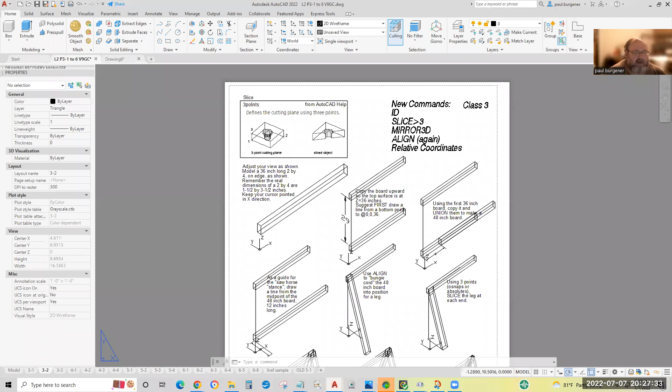Okay, in intermediate class this afternoon we went through the sawhorse exercise in the handout. Here's the handout for it. I've been meaning to update or redo this for a while, so you might want to stop and get yourself a copy of this.

I'll refer back to it off and on, but again, I need to redo it. It's kind of advanced for this stage in what the class is learning.

Anyway, I'll start by following the steps 1 through 9, trying to do it in the order shown, from top upper left to lower right. Let me start a brand new start-from-scratch drawing.

I think part of today's confusion was the 45-degree polar tracking angle with an isometric viewpoint. The z-axis perfectly lines up with the 45-degree polar tracking line on the XY plane, so I'm going to change it back to 90 to avoid that confusion. So again, I'm setting polar tracking to 90.

As always, I recommend my 5 favorite object snaps: endpoint, midpoint, center, quadrant, and intersection. Never have tangent, perpendicular, or nearest running. Nearest might be handy for short-term use, but always, always, always set it back to these 5 object snaps, and I don't think you'll ever have any regrets.

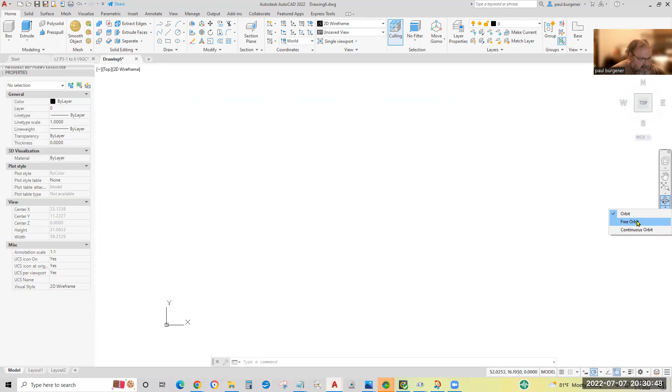Let's go back to a brand new start-from-scratch drawing. I'll go to the navigation bar, free orbit, and rotate it so it's approximately a southwest isometric, but I'll go out of my way to make sure the z-axis is not pointing straight up. We'll hit escape to get out of the 3D free orbit.

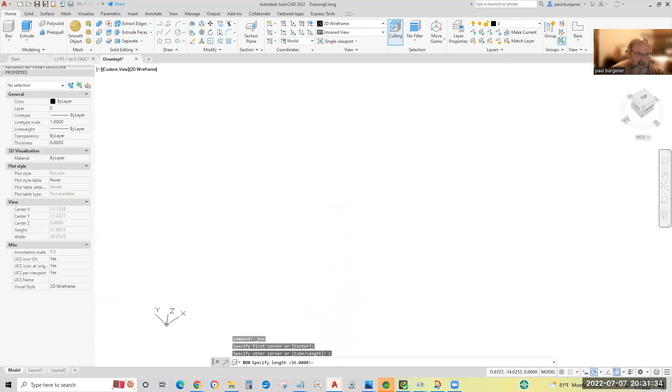Step 1 is to make a box. It might be easier if I start on 0, 0, 0, but I'd like to keep the icon intact without obstruction. So I'll pick a random point, pick length, because I don't know what the opposite corner is without typing the old-fashioned relative coordinates. I'll type length and line up the polar tracking angle to exactly 0 degrees.

We want the top board of our sawhorse to be 36 inches, so for the length in the X direction, I'll type 36 and hit enter. By the way, length is always, always the X direction. Width is always, always the Y direction. I'll type 1.5, the cut finished width of a 2x4.

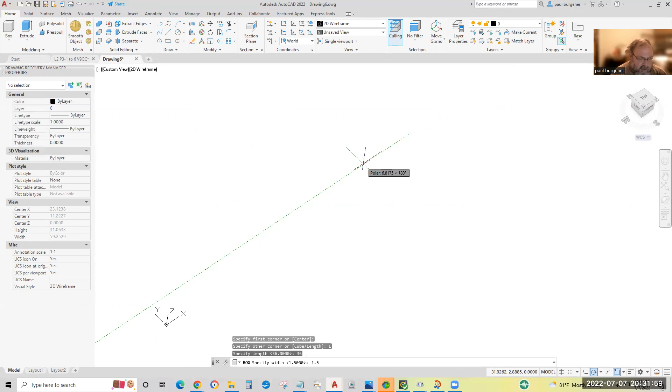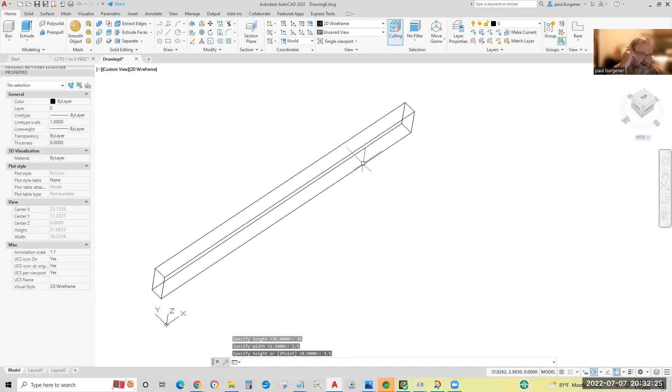And the height of a cut 2x4 is always 3.5, not 4. It's 3.5 because they lose a half inch after the kerf of the blade and the finish sanding, so 1.5 by 3.5 is the real dimensions of a 2x4. I'll hit enter, and there is my 2x4 that is 36 inches long.

Let me do an ID for good measure. ID, what happened? ID, enter. This point should be on the z=0 axis. It is. Hit enter. This point should also be on z=0 elevation, so the bottom edge of this 2x4 is lying flat on the floor, being the XY plane.

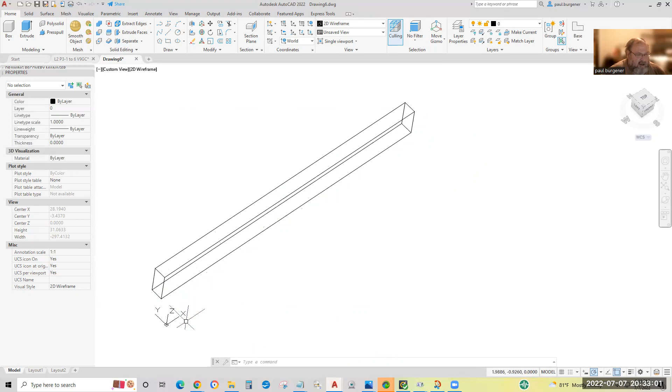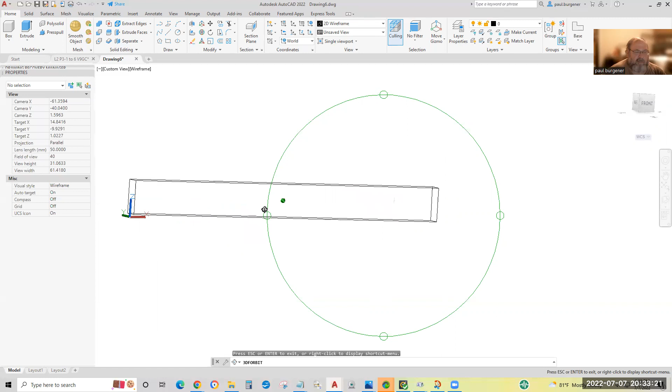So there's our first step. I'll do a 3D free orbit to get the warm and fuzzy feeling, lining up the XY plane. You can see that the board is perfectly on the floor, assuming the floor is the XY plane. Okay, I'll hit escape to bail out of 3D free orbit.

I want the top surface of this board to be 36 inches high, but I want this board to be intact so I can stretch it or copy and union it into a 48-inch board, because the legs are going to have to be longer than the top board is high off the floor, because the legs are diagonal. So they've got to be longer than the height of the board at the top.

Okay, I'm going to launch a line command, starting here at the z=0 corner. Double checking I got +Z, not the 45-degree polar tracking angle, which I've turned off anyway. I'm going to set 36 units. AutoCAD unit represents an inch in this case.

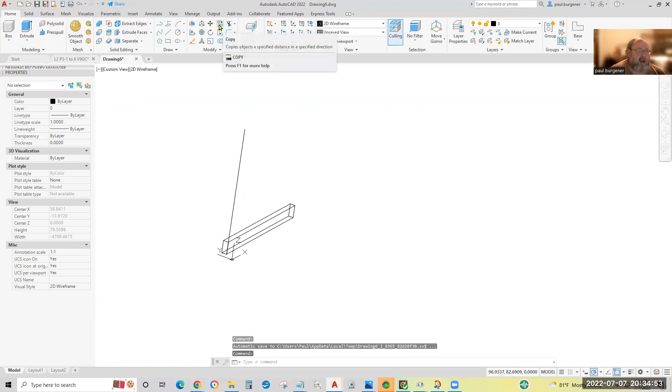Okay, I'll copy this board so that these four corners are at the z=36 elevation. I'm on the 3D modeling workspace, so bear with me, I'm not quite as used to where icons are. I'll click copy, select the board, and hit enter.

I'll grab the copy from its original spot and snap it to the z=36 point on this vertical line. Hit enter. Now to double check, I'll type ID, enter, and snap. Yep, z=36. Object snap at the end point, z=36. Good, both ends of this 2x4 are at a z=36 coordinate.

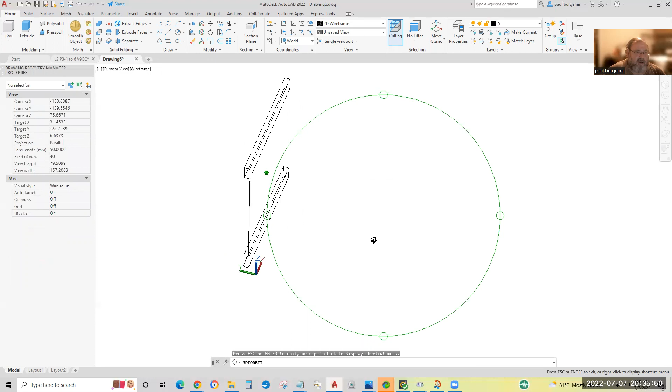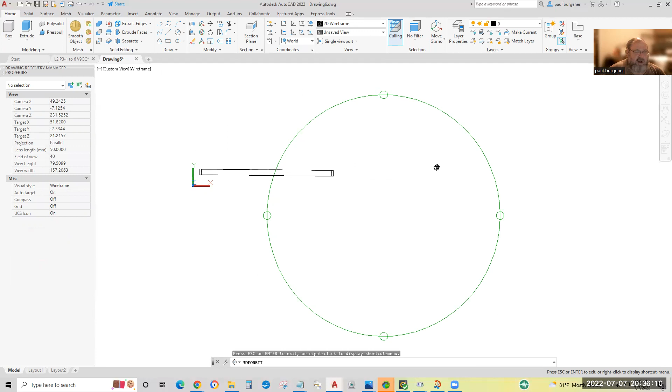Straight up from the origin. I'll do a 3D free orbit to get the warm and fuzzy, looking straight down the z-axis. XY, here is a plan view. I'm looking straight down at the XY plane, straight down the z-axis, and you can see both boards are going straight across in the 0-degree direction.

Let me return it back to the pseudo southwest isometric, being careful not to place the z-axis in the horizontal direction, which causes a lot of confusion. I'll hit escape to get out of 3D free orbit.

Now eventually the legs need to be longer than the height is, because the legs will be at a diagonal, and of course the hypotenuse is longer than the leg here. So I suppose I could stretch it out with press pull, but I've been using copy all these years for this exercise, so I'll copy it, polar track in the 0-degree direction, type 12, enter, and that'll make the combined original plus the copy 48 inches long. Again, the original was 36, and I placed a copy 12 inches down the X polar tracking angle.

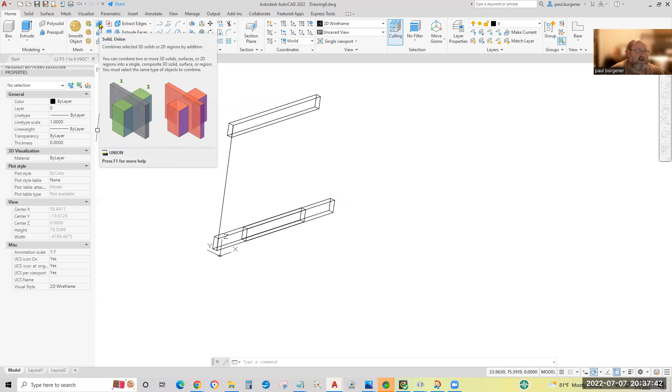Okay, hit escape. I'll union, U-N-I-O-N—if you're not accustomed to the icon, type U-N-I-O-N. I'll click the union icon, select both, and hit enter. And now this board at the bottom here is 48 inches.

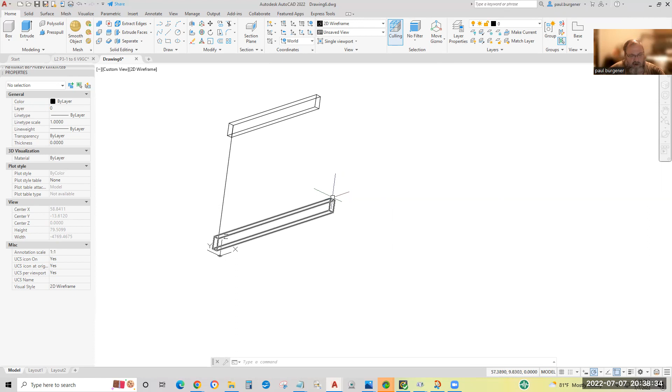Do an ID again, hit escape, bail out, ID, enter. Down here is Z equals 0. The X and Y is about 2 by 4.5, roughly, because I didn't build it out perfectly on the origin. The coordinates at the other end here should be the same Y, and 48 plus the X, and a Z equals 3.5. I've already forgotten the original coordinates, but I'll type ID, enter, click either one of these points, and sure enough, it's Z equals 3.5.

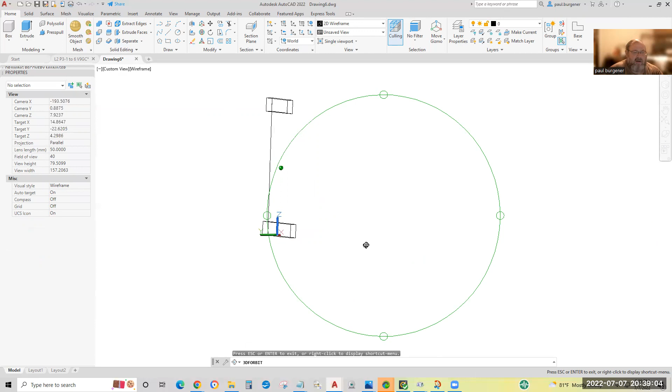Looking good. I'll do a 3D free orbit, get the warm and fuzzy, line up the X and Y axes, so I'm looking right across the XY plane as if I'm lying on the ground, assuming the ground is the XY plane. And yep, everything's looking good. This board is 36 inches high at the top and directly above my 48-inch board.

Now the hard part. I'm going to align this 48-inch board with this 36-inch board so that the 48-inch board comes down at an angle, touches the floor at 12 inches from that corner there. I still need to draw the 12-inch chalk line, but it'll penetrate the floor right at 12 inches from that vertical line and continue on a few inches. 48 inches is more than enough to reach the floor at that angle, whatever that angle is.

Now, I suppose I could line it up so that the board sticks straight out and continues at the Z equals 36 elevation and then swing it down. But the handout calls to use the align command, not the 3D align, but the old align command to do it all in one step.

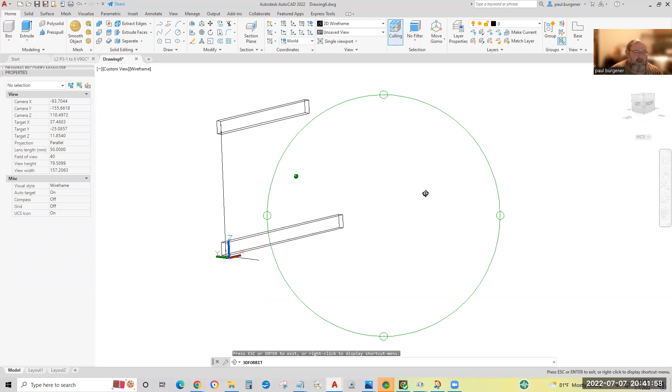I'll 3D orbit, double check. Yep, everything is lined up with the XY plane. That 12-inch line is on the XY plane, also known as the floor.

Now, how can I change the color? I'll do without. No, use regular lines.

I want this point right here of that 48-inch 2x4 to perfectly line up with that point there, which happens to coincide with that 36-inch chalk line I drew earlier to raise up the 2x4. Now this, I hit escape.

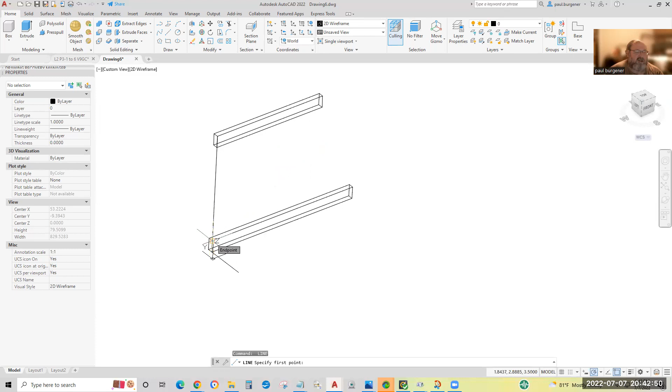Now this point on the 48-inch board, I want to attach to approximately right here on the board, on the 36-inch horizontal board at the top. Notice it's homing in on the end point. Well, I can't rig an O-snap to be 36 inches,

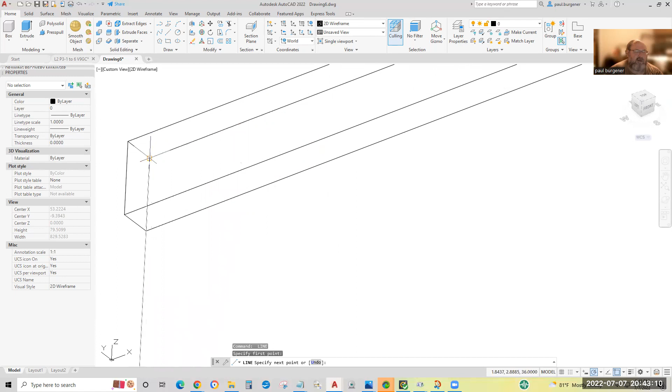3.5 inches off of the end point. So the second bungee cord will try to get that corner here as close as it possibly can to the midpoint.

Okay, there, that midpoint. Now those 2 points alone would arrange this 2x4 to stick straight out horizontally, being perfectly level with the top of this 36-inch elevation, 36-inch long board.

However, at the same time, I want this point to be as close as possible to this guideline end. Remember, the first bungee cord from there to there is infinitely strong. It'll shrink down to 0 when released the final enter.

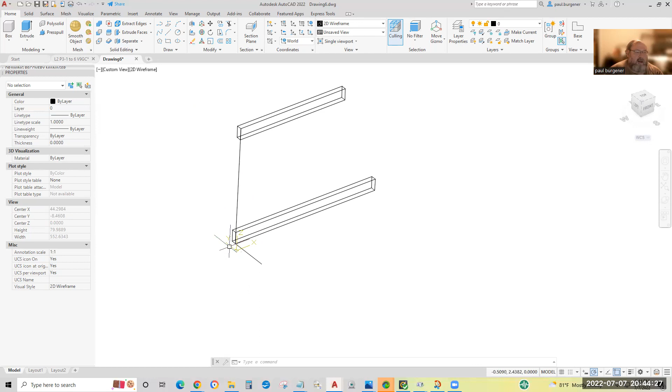Bungee cord from here to some point along this line, midpoint is convenient. It's slightly weaker. And the bungee cord from this point to the end of this line is slightly weaker than the second, which is slightly weaker than the first. So all 3 bungee cords: the first is infinitely strong, second is weaker, third is weaker.

We'll swing this 48-inch 2x4 around so that this point right here will coincide with that point. The point 3.5 inches above will coincide as close as possible to the midpoint, so it'll strike about right here, 3.5 units toward the midpoint from the corner.

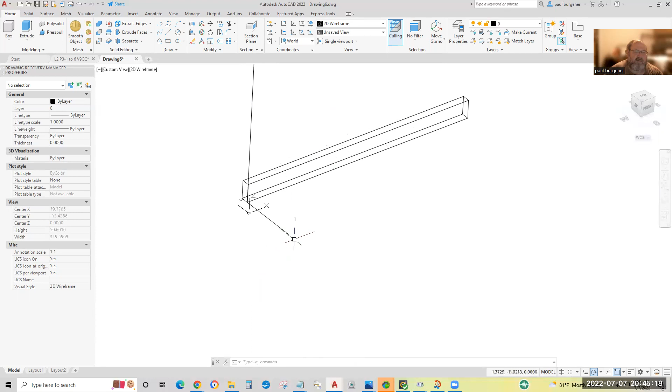And this point will be as close as possible to this point, which will force the angle of the board to go through that point and slightly further through the XY plane or into the floor. Okay.

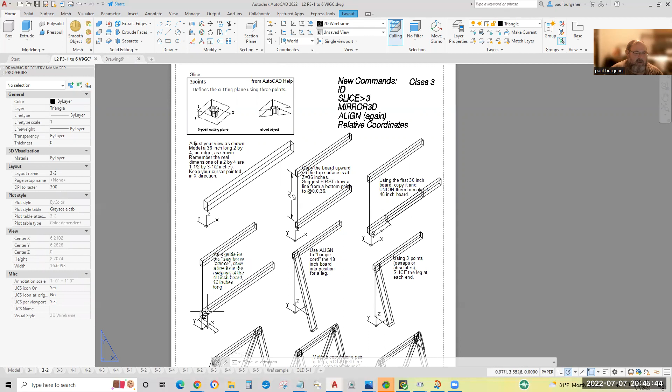Let me double check. We copied that. We made the 48-inch board. We made the 12-inch guideline on the XY plane.

Use ALIGN to bungee cord the 48-inch board into position for the leg. Notice that this point is as close as possible to the end of that 12-inch line on the deck, on the XY plane, on the floor.

Okay, let's go back to our blank new drawing. Again, the 3D align icon is not intuitive. I don't recommend it. Drop down and use the old original align icon, which is good for 3D.

Click on the align icon. Select our 2x4, it's 48 inches long. I'll select it again just for the sake of the video. Got one item selected, hit enter.

Again, bungee cord number 1 will hook onto this point. Being infinitely strong, it'll draw that point of the 48-inch board perfectly to this point of the 36-inch board when it compresses to 0 length. So the bungee cord will make that point coincide with this point. Click.

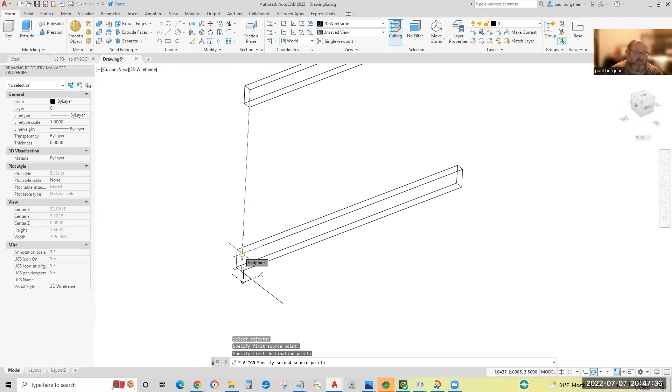Take the top corner directly above the first bungee cord hook number 1 point. I just clicked on the 48-inch board. And I want that, ideally, to be up here at 3.5 inches from the end.

But again, there's no O-snap that says, hey, snap from the end of the board 3.5 inches. So the next best thing is to guide it as close as possible to the midpoint.

Remember, if you don't scale or change the overall size of the 48-inch 2x4, then all dimensions of the 48 2x4 will remain the same.

So there is bungee cord 2, hook number 2. Click. Now that, notice any alteration of your display will eliminate the virtual bungee cords.

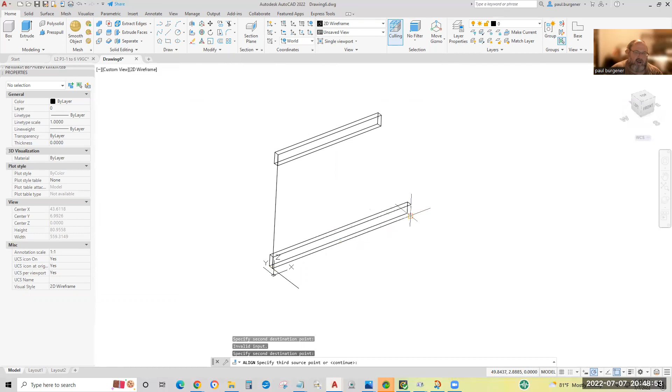I want this corner, which will be directly below this corner if the 2x4 went vertical, to penetrate the XY plane of the floor. Click at this point. So there's the third bungee cord, which is the weakest of the 3.

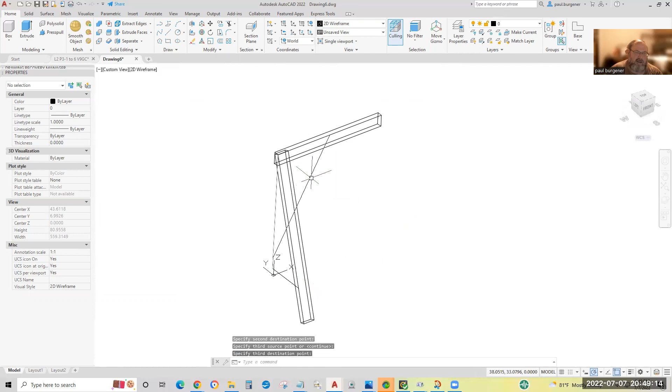Watch what happens when I click. This is still a bungee cord, and I'll tweak the display and you'll see it's disappeared. There, it's disappeared.

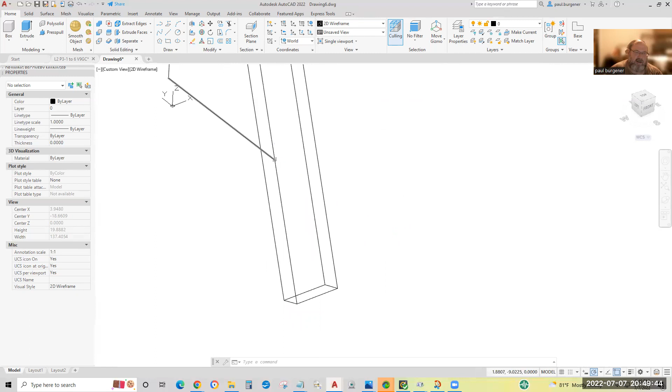Okay, again, it might be easier to rotate this board and move it vertical so it sticks straight out horizontal, parallel to the ground, and then swing it with the align command so that this point here is as close as possible as it can get to there. It might be more intuitive for students.

Okay, let's look back at the handout, which again is pretty old. We finished steps 1 through 5 here.

Step 6 says use 3 points. Osnaps. Why did I say O snaps? O snaps have nothing to do with it.

Use 3 points to slice the leg at each end. Oh, the osnaps are to slice it at the top end. That makes sense. Slice it at the bottom, just pick 3 points in open space that are at Z equals 0. Be very, very, very careful not to creep up the Z axis.

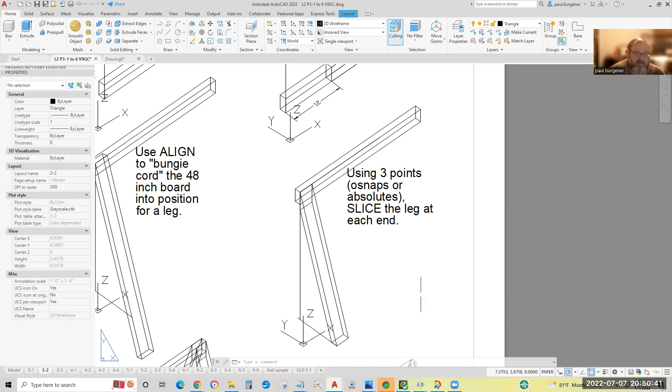Okay, use 3 points to slice the leg at each end. We'll go back to our new drawing and launch the slice command. Here's the release 2020, and I got 2022.

Both new releases make it a little sandwich instead of a knife cutting a loaf of bread, like older releases did. Or you could always type the word slice, enter. We'll click the slice icon.

Click. It says select what you want to slice. I really should have this command area larger. I'll select this 48-inch long diagonal board and hit enter.

Now there's a variety of ways I can slice it. I've had extremely good luck with the 3 points method, which is the default. The hard part is remembering to hit enter to agree with the default. So click 3 points or simply hit enter to agree with the default. I'll hit enter to agree with the 3 points default.

Now I need to specify 3 points on the XY plane. Could be 0,0,0, could be 0,1,0, could be 158, comma 0, comma 0. Any 3 points on the XY plane.

I'm going to pick 3 points at random, being very careful I never see the Z polar tracking angle up here. So that's asking for specify first point.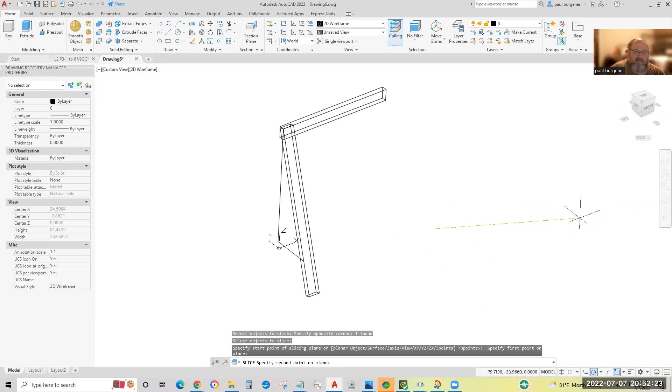I'll click over here to be very careful I don't go up the z-axis. Click again. And I'll click over here, being very careful I don't go up the z-axis. So all three of these random points in space are going to be on the XY plane.

So the infinite guillotine blade that'll slice everything in every direction that's selected, that is, will cut everything off at the XY plane.

Click. Last step says which side you want to save. I know I want to save the top, but I like to have my decisions and decide individually instead of having anybody else, even the computer, do things for me. I'll hit enter to accept both.

There's the slice right at the z=0 XY plane. I'll do an ID enter. ID enter, and O snap at the slice, and sure enough, it's z=0. So that little space right there between these two pieces is the XY plane or the floor.

Okay, let me enlarge this, rats. I don't know why these command areas get so finicky and I can't resize them. I'll leave it as it is.

I need to erase this bottom piece then, since I left both pieces intact by hitting enter to allow both pieces to exist. I'll click the erase icon or e-enter or erase enter, and erase this part that penetrates below the floor. Everything down here is z=negative something. This is all below the z=0 plane. Hit enter.

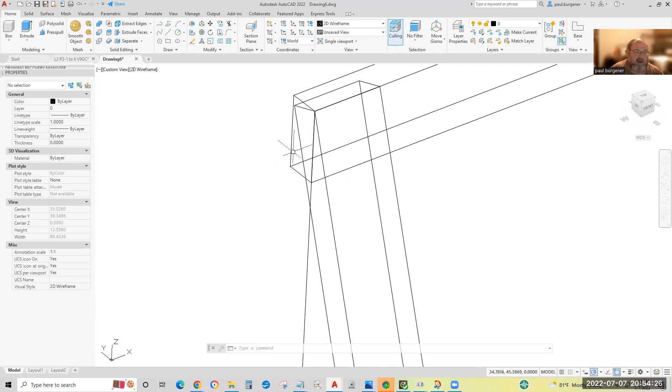Oh, I need to slice this little doorstop wedge that's superimposed between both of these 2x4s. Well, to slice this little doorstop wedge here, I need to slice this 48, or this diagonal leg, no longer 48, but this diagonal leg.

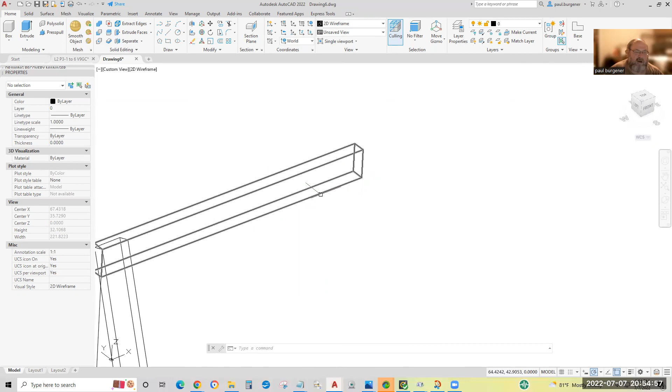I need to slice at any 3 points on this face of this 2x4. Okay, any point along this edge, any point along this edge, and any point along this edge. The only condition is the 3 points can't form a straight line.

Okay, so I'll launch the slice command again, or type SLICE enter. Slice command says, hey, what do you want to slice? I want to slice this diagonal leg. Select it with a crossing window, hit enter.

3 points is the suggested method of slicing, which I highly recommend. You can do anything, almost anything with it, except the slice in the view, which is rare. I'll hit enter to agree I want to slice with a 3-point plane.

AutoCAD says, okay, we're going to slice with a 3-point plane, specify the first point of the plane. And then they'll ask the second point of the plane, and then they'll ask for the third point of the plane. 3 points of the plane will define the guillotine that'll spin around and cut everything off that you select.

First point, I'll say right there. Second point, I'll say right there. Third point, I'll say, that's good. It could be there. Could be either of these endpoints, just so 3 points somewhere along the surface of this 2x4. I'll go right here, got a good clear shot. It's not too hard. Click.

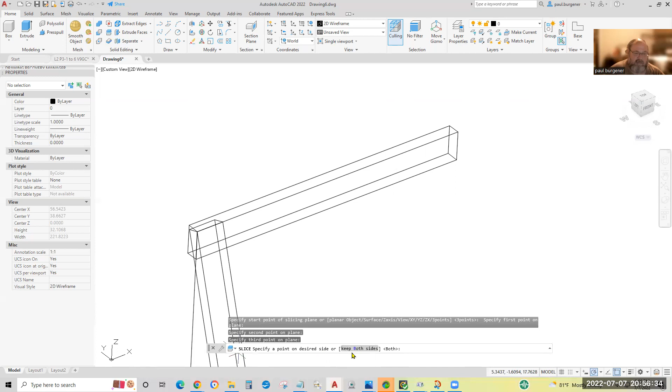Got that command prompt or information line saying specify the point on desired side or keep both sides, with both being the default. Well, as usual, I'm slicing up here. I want to keep both and manually erase it myself later. So I'll hit enter or click both to have both pieces, and sure enough, there's the slice.

And this piece here that I'm flashing by sliding my cursor over, that is the scrap metal, scrap lumber. I can't think of a use for it in this project. I wish I could, because I hate to waste anything. So I'll hit the erase icon and select this severed, sliced off doorstop and hit enter.

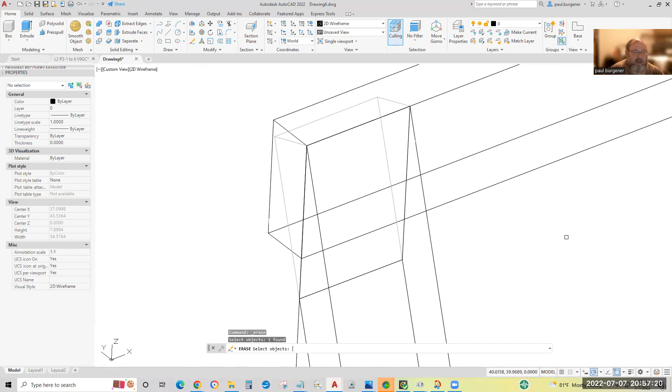So now we got a beveled edge at the top. We'll cut the bottom level with the XY plane. And sure enough, I lost my navigation bar. Always something. Click view, click navigation bar, and it still doesn't come up. Okay, there it is. It's a little higher than I expected it.

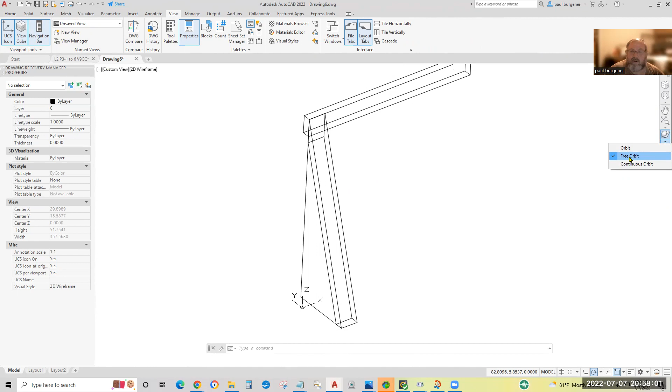We'll go to 3D free orbit, not orbit. I highly recommend free orbit because of those little round circles at the quadrants of the gerbil wheel. Free orbit. Line up our viewport so we're looking straight across the XY plane. Grab one of these and rotate it around. Everything is looking good, just like we had expected.

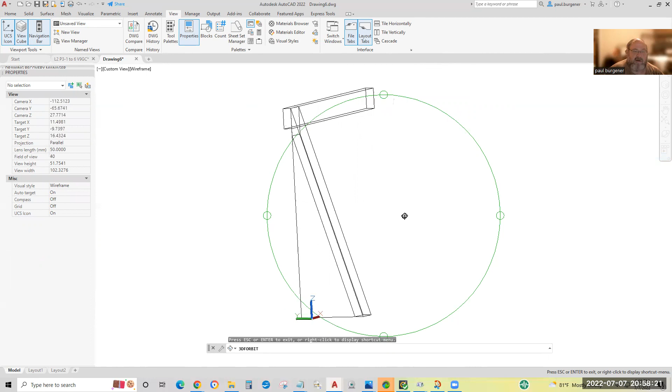I'll alter my display, being careful that Z is straight up. Hit escape to get out of 3D free orbit.

Now we got one diagonal leg from the top board at 36 elevation down to the XY plane or the floor. The leg on the other side is going to be a mirror copy of it. The regular old 2D mirror command will work perfectly if we O-snap at the midpoint there and then polar track on the XY plane. But let's use the 3D mirror command with a 3D mirroring or a 3-point 3D mirroring plane rather than cause confusion with the old 2-dimensional mirror command.

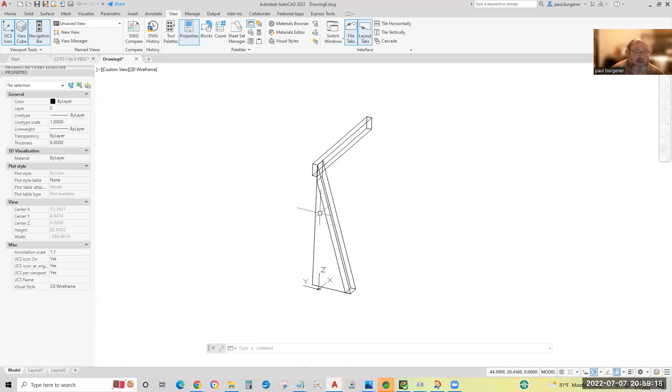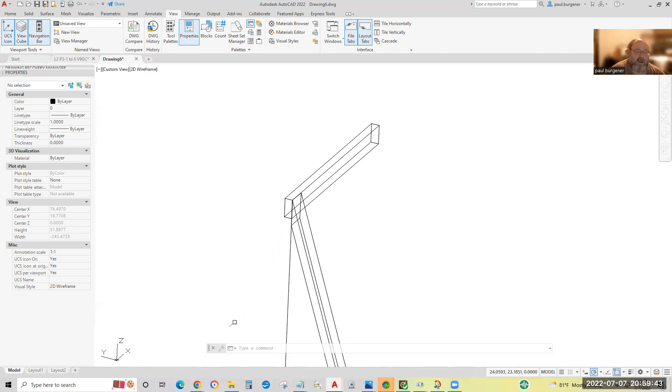If I were to create a virtual plane from that midpoint to that midpoint and to that midpoint, in other words, the plane perfectly rips this 2x4 in half, the two pieces that are 3.5 tall and 3/4 wide, then it would reflect this leg straight across that 3-point mirror to make the second diagonal leg from the near end.

Okay, let's go to home, click 3D mirror, or mirror 3D, 3D mirror.

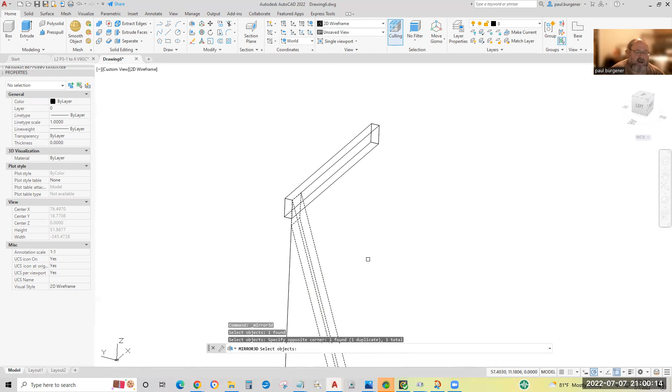Okay, select objects. I want to reflect this guy. I selected it. I'll select it with a crossing window to be sure. Got only one item selected, just the one leg. So that's all I want. I'll hit enter.

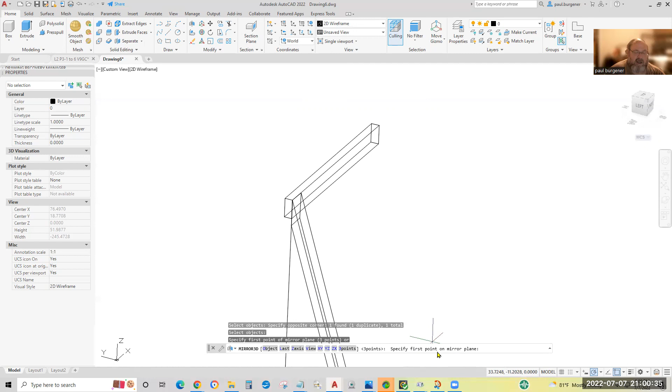I definitely want to use a 3 points method like we did for the slice command. So I'll hit enter to accept the suggested 3 points default. Enter. Now it's going to ask me for the first point, then the second point, then the third point. They're all midpoints on these 1.5 long edges of this top board. There's the third point of the 3D mirror.

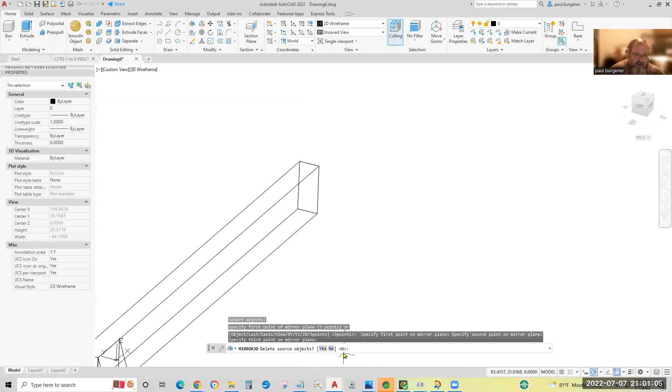Now it's asking, as always, do you want to delete the source objects, meaning the old objects that you just made mirror copies of? Very rarely do you say yes. I'll hit enter to answer this question with no. Zoom back out, and there's the original, and there's the new mirror copy.

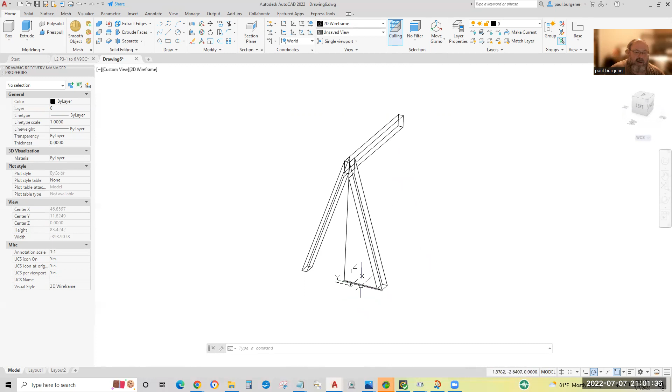I think I can lose these two guidelines now. This was just a construction string set at 36 elevation to place the copy, just like you're building a cinder block wall. You place a stake and a string and indicate the top surface of the wall. This is the 12-inch chalk line, so that this point would be exactly 12 units from the corner there. The stance would be 12 and 12 and 1.5. It's 25.5 inches from that corner to this corner. I have no idea what angle that forms, but it looks reasonable.

Anyway, I'll erase those two chalk lines. Erase, select the vertical 36 and the 12 unit chalk line that points straight into the negative Y direction.

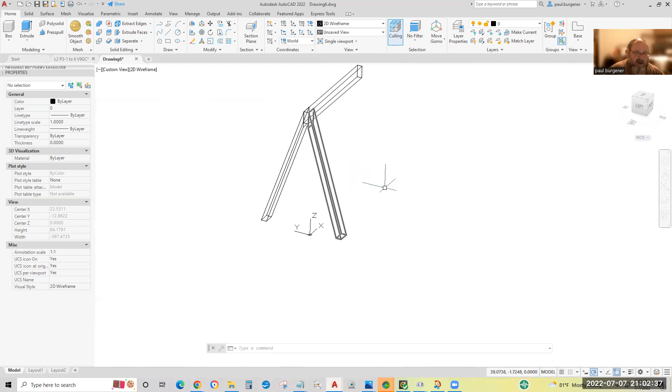We don't know how to create a UCS on this surface yet, which would make forming the triangular gusset plate, the diagonal support of these legs to keep them from spreading apart, easier. So I'm going to copy these legs and rotate them flat on the deck and then trace the V-shaped gusset plates as they contact the XY plane or the floor.

Click copy, select them both, move them to the side. To be on the safe side, I'll type ID, enter, and every one of these points should be Z equals 0. Enter, enter, enter, Z equals 0, good. All 4 points at the bottom of each of the legs is perfectly on the XY plane.

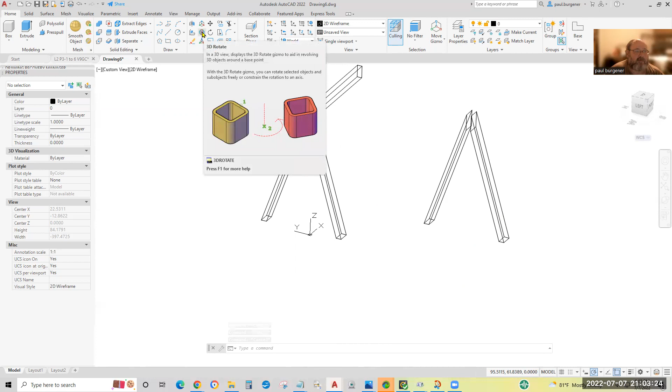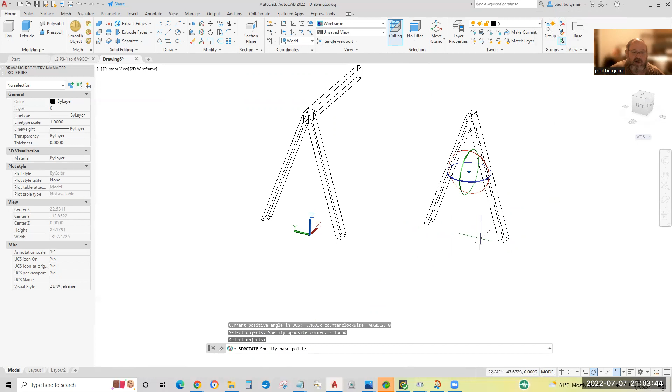Escape, I'll hit 3D rotate. I kind of like the old rotate 3D, I'm getting used to this. I'll click 3D rotate, select both of these copies, hit enter. It asks for what base point you want. I'll snap at any one of these 4 endpoints at the bottom of the leg closest to my face. Click.

Now I want the green wedding ring to be the hand wheel at which I rotate this thing, having established a hinge right at that point.

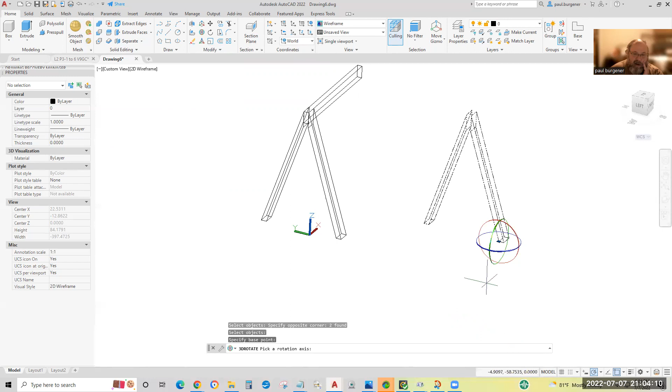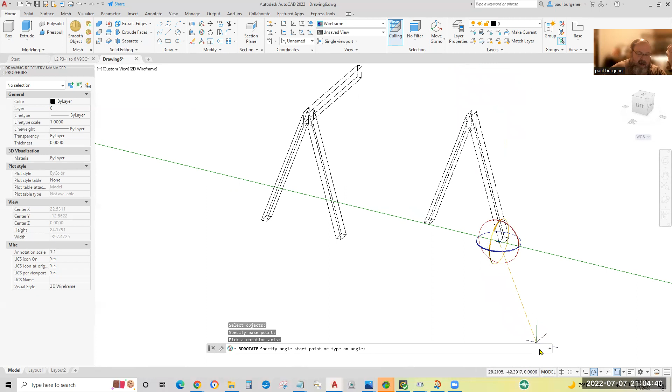So I'll tap on the green wedding ring, making it gold. Now from experience, a positive angle I type will bring the top of this object straight down. You can also click start angle by going in the 0 direction and swing it straight into the 90-degree direction. There's 90 degrees, there it is. I think that's 90 degrees, or is it the Z? Anyway, I'm going to type 90 and it'll flop straight forward onto the deck. There, it's on the deck.

Type ID, enter, snap at any one of these points, Z equals 0. Enter, Z equals 0, Z equals 0. Yep, it is lying flat on the XY plane or on the floor.

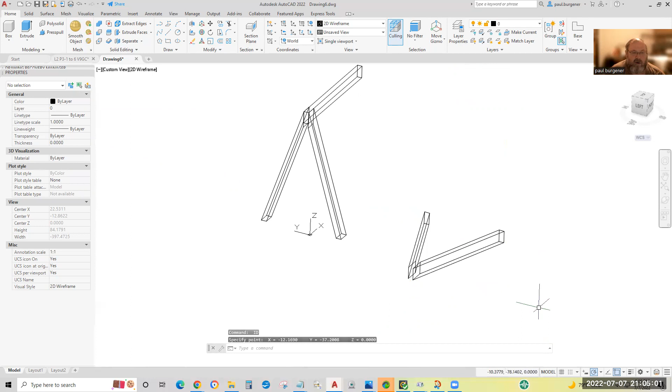Don't believe me? All right, we'll stretch it, we'll line it up so we're looking at the end. I'll grab here and rotate, and you can see, yep, those legs are perfectly on the floor.

Okay, let's use line. I'll trace this to form the gusset plate, there to there. Enter, enter, and there to there. That's about all I need.

I'll erase the board since I got chalk lines on the XY plane or on the floor. Those are the lines I drew on the floor.

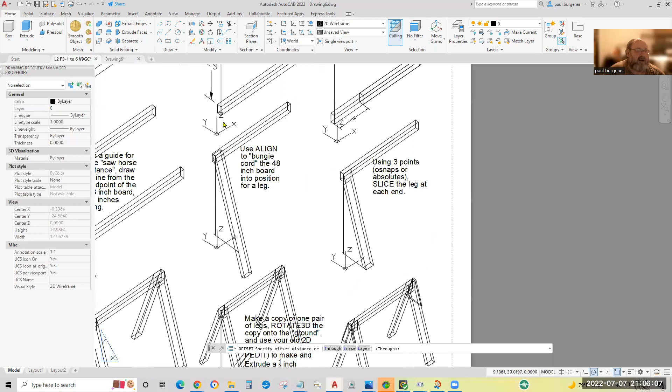How far from the top of the triangle gusset plate do I want the bottom? Say 12 inches, from top to bottom. All right, we'll offset. I don't know how, probably getting way off of this. You know, we're in step 8 here, we're assuming a 1/2 inch plywood.

Trying to make this little triangle plate on the XY plane or on the floor. I don't see a dimension, but I've been in class, I've been using it 12 units from the top of the triangle to the bottom of the triangle.

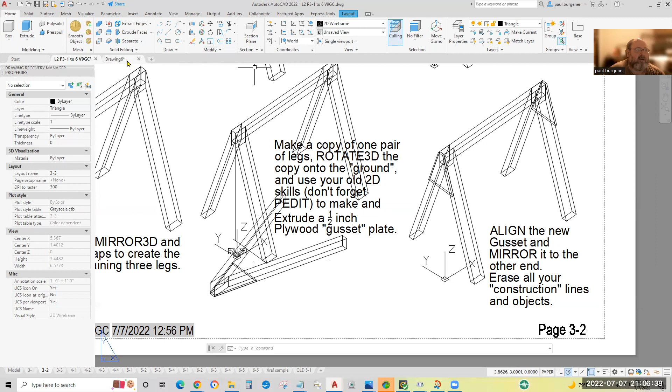Let's go back to our drawing. Let's offset by 12 inches this piece in this direction. Well, that's way too short. Well, the extend command will shoot at both directions.

I'll hit enter to finish the offset command. We'll click extend, which is a drop down from trim, or type EXTEND, enter. It asks for boundary edges. Surprised it doesn't say select all. I'll click boundary edges, there it says select all.

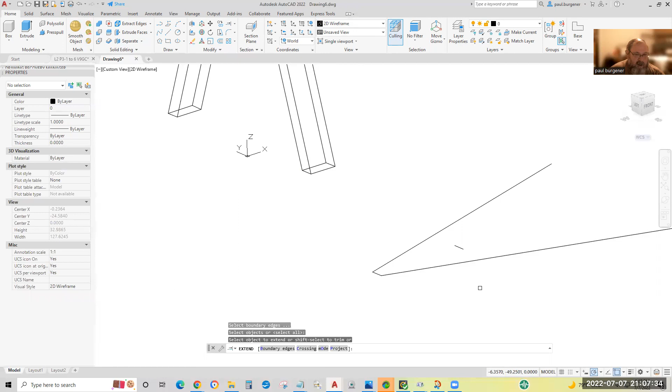I'll hit enter because I want to extend whatever I click to whatever it'll hit. I'll hit this end of the line, it'll extend in that direction till it hits something. I'll click on the other end and it'll extend in that direction until it hits something.

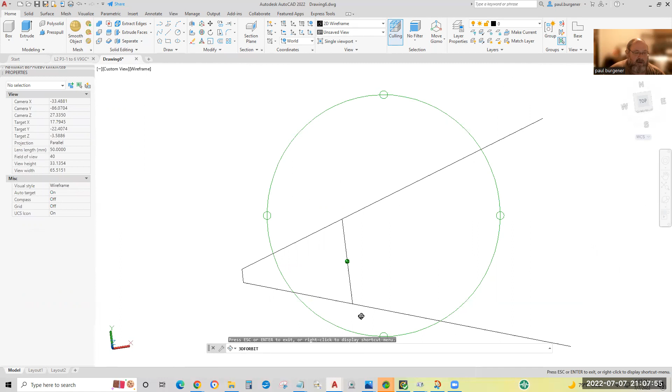You can take a look top down. Right there, it's almost looking straight down. We want to salvage this pseudo triangle piece here to extrude it into a sheet of plywood that'll nail onto the top of the diagonal legs.

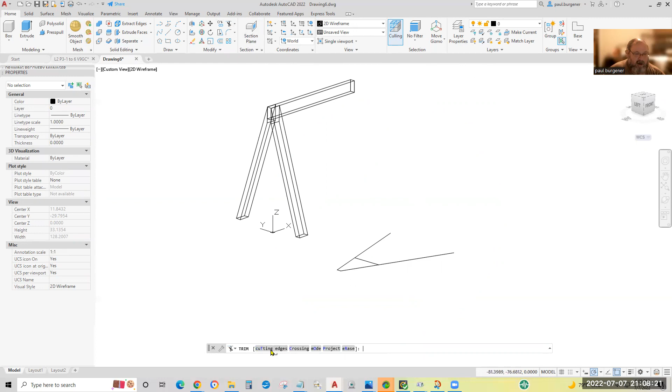I'll hit escape. I'll click trim, drop down the extend, and click trim, hit cutting edges, hit enter for everything, and shave off the whiskers. This will be the, once we get it into a closed polyline or a region, we can extrude it straight up a ½ an inch. I'll hit enter to finish the trim command.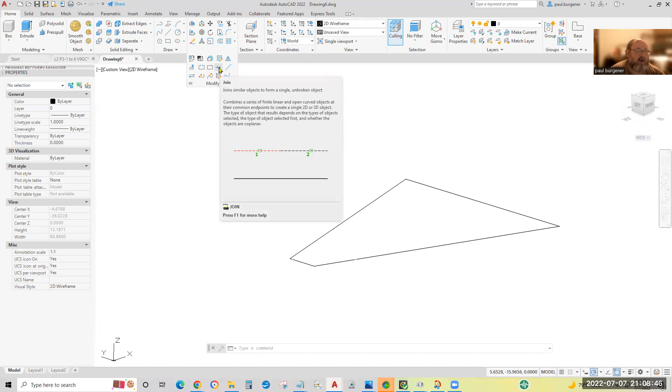I'll launch the join command rather than the p-edit command. Join is a step quicker. Click the join icon, and type J enter. I'll select all of these and hit enter. I'll select it, notice the properties say it's a polyline and says it's closed.

And that is one of the few objects that can be extruded. I'll hit escape to deselect. I'll click the extrude icon. I'll select my closed polyline, hit enter. Now it's asking, hey, what height do you want to extrude it?

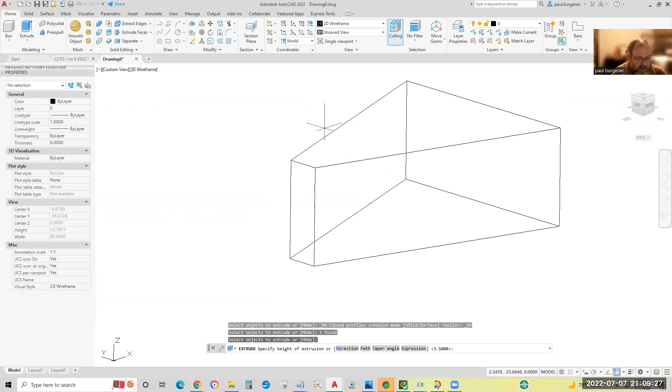Let's assume there's plenty of ½ inch plywood around. So I'll type 0.5 and hit enter to extrude it a ½ a unit.

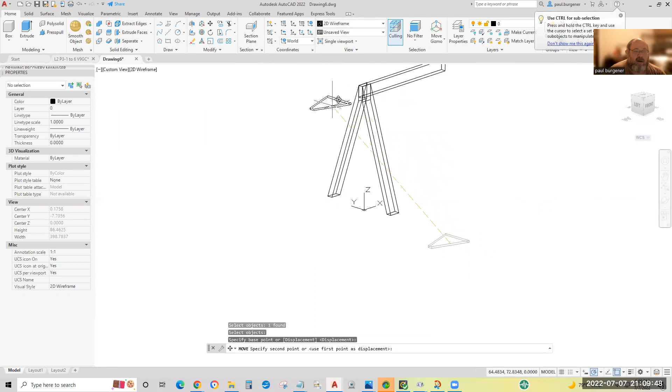Now, how do we upright this and get it so we can nail it onto the top of the legs? Well, we can do the same as we did with aligning the leg. We can align the plywood gusset plate. Right now, it's still on the XY plane, I just moved it there so I got short distances to O-snap.

These 2 points to these two and this one to the bottom. Double check, I'll do ID enter, and all of these points, ID enter. Yep, Z equals 0.5. Why is that?

Interesting, it's minus 0.5. Somehow I accidentally extruded it downward. So these top points are at Z equals 0 - this is the top surface of this gusset on the XY plane, and I accidentally extruded it downward.

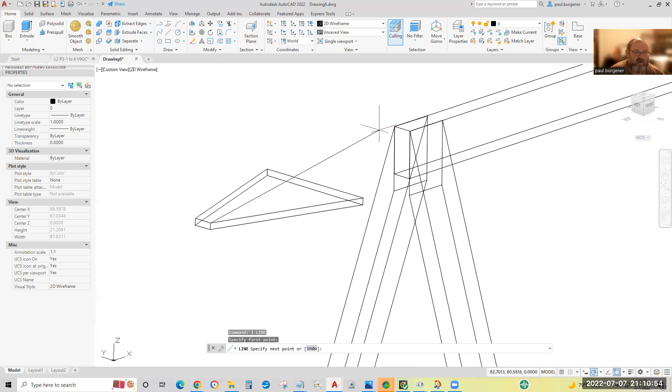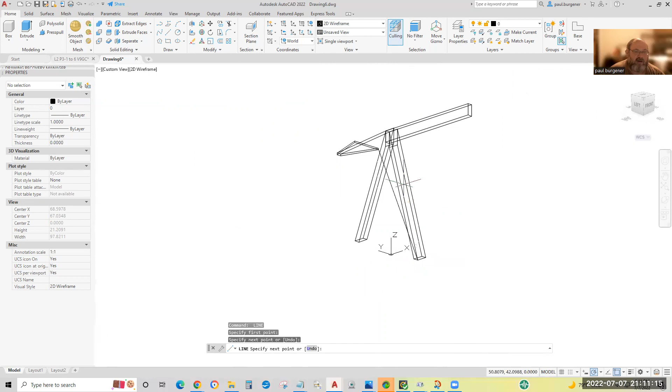In any case, I want to connect the bungee cord from there to there, being the infinitely strong one. The second one I want to connect - these are just regular lines. There's the second bungee cord, and the third bungee cord I want to go from there to any point at the bottom here to flip the thing. So these 3 bungee cords, once released, will perfectly align the triangular plywood on top of these 2 legs.

Again, first one is infinitely strong, second one's a hair weaker, third one's a hair weaker. Let me erase these lines and use the exact same - there's 1, there's 2, there's 3. I'll erase 3 lines, launch the 2D old align command,

or AL enter. Select the half inch thick plywood. Select objects - I'm done selecting objects. All I want is the one item found. I'll hit enter. Okay, bungee cord, hook one, bungee cord one, hook one. Bungee cord one, hook two.

Specify second source point. Okay, bungee two, bungee cord two, hook one. Bungee cord two, hook two.

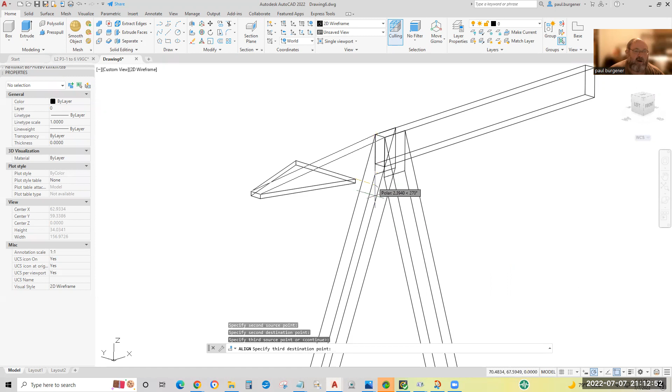Now, as soon as I alter my view, those two little virtual lines will disappear, but can't help that. The third bungee cord source point or hook one I want to put there. And I want to put it - there go the virtual lines. I want to put it as close as possible to any of these 4 points. This point is probably intuitive. Click.

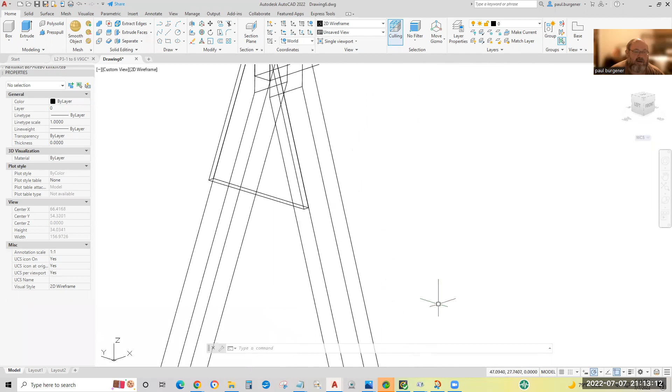Now, the legs and the plywood on the far end of the sawhorse are a mirror copy of these. And again, I could use a 2D mirror command and any one of these endpoints - draw a mirror line across the floor directly below these midpoints. But I'd like students to learn the 3-point mirror process, so let's exercise it again.

Should we go to 2D wireframe? Yeah, that way we can see these 4 edges of the board, O-snap a little easier. And again, check the conceptual or one of the higher end visual styles just so you get your bearings. Go back to 2D wireframe.

Where's the 3D mirror? The mirror 3D - there it is, mirror 3D. We'll type mirror 3D or click the icon. I'll click the icon. Mirror 3D says select objects. I'm going to select these 3 objects with the crossing window here - the 2 legs and the plywood. That's all I want, those 3 objects found. I'll hit enter.

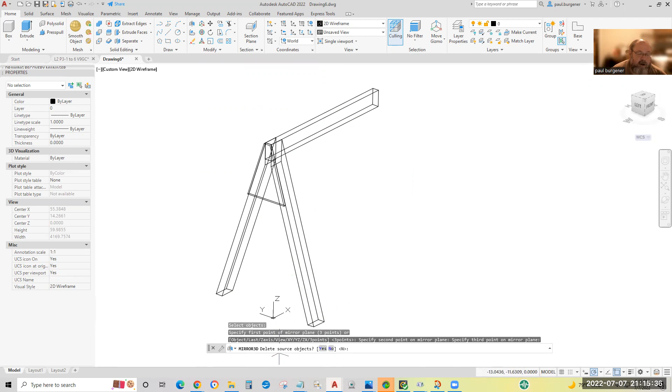Click, click, click. It says, do you want to delete the source? Rarely do you say yes. I'll hit enter to accept to say no. There, we're done.

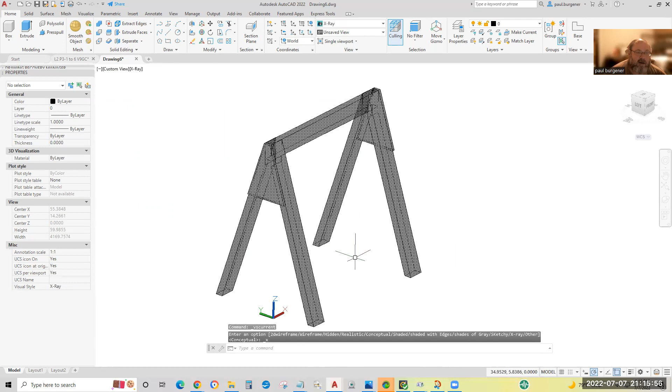Let's do a hidden - looks good. Do a conceptual, do an X-ray. It looks good. Go back to their conceptual.

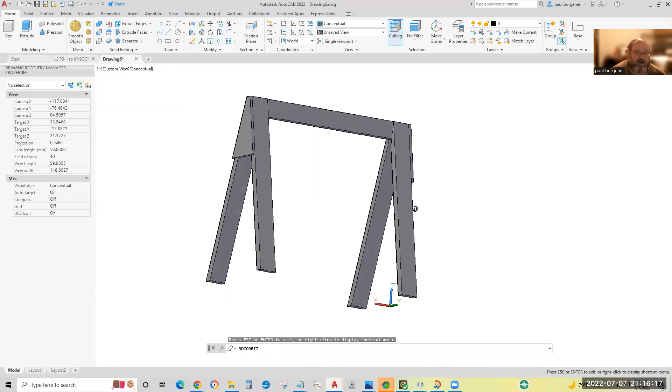I'll do a continuous orbit to get the warm and fuzzy that I've completed the assignment. It's not quite spinning on a vertical axis. Everything's looking good. I'm going to come around to where it was and hit escape. I believe we've got a winner.

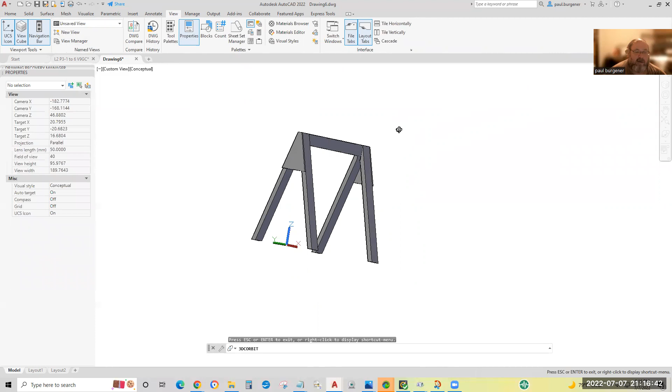Yep, I lost my navigation bar again. View - nope, not there. Click. Nope, not there. Click again. There it is. Check it - oh, it's still in 3D continuous orbit. I'll hit escape.

I tell students to save it because if we got time, we'll make a circle or an ellipse higher than this sawhorse, and we'll do a flyby animation. But that's low priority if we don't get around to it. That's about it - I hope that explains it better than the handout. I'll put this on YouTube in a second.